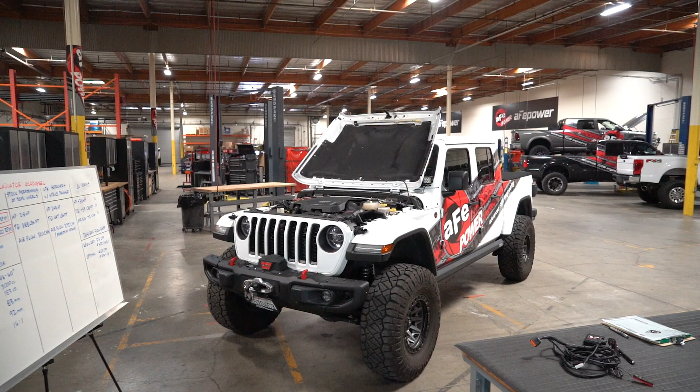Change the tuning, change the pressure, change all this stuff in the ignition, and do as much as we can to get the horsepower back where it is, get the torque low and high, and make the drivability come back. And for that, we have the Scorcher Plus, which is here, and I will have Chris talk about it in a minute. And also, this has to go with an air intake system, the Momentum intake.

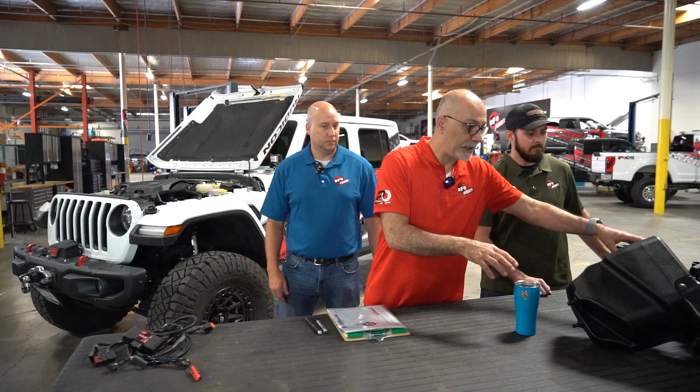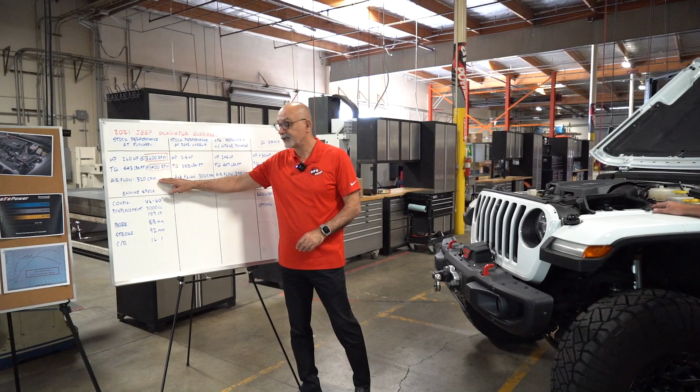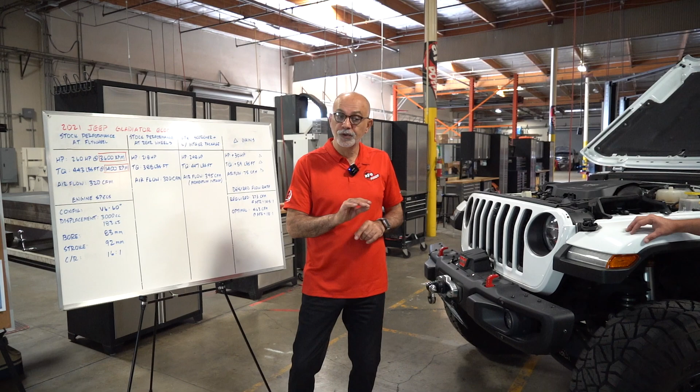We have a stock intake here, and let me go back and find out what we are looking for. So, stock intake flows 320 CFM. This is done at 7 inches of water, roughly a quarter PSI. At 7 inches of water restriction, the losses due to the pumping are minimal for the horsepower. That means you don't lose horsepower, you don't lose torque because of the induction tract. The factory flows 320 CFM.

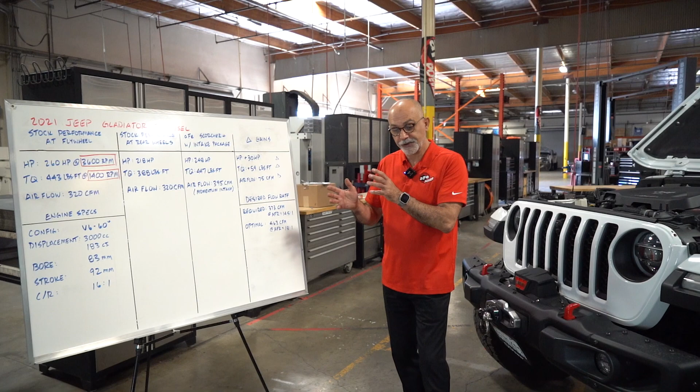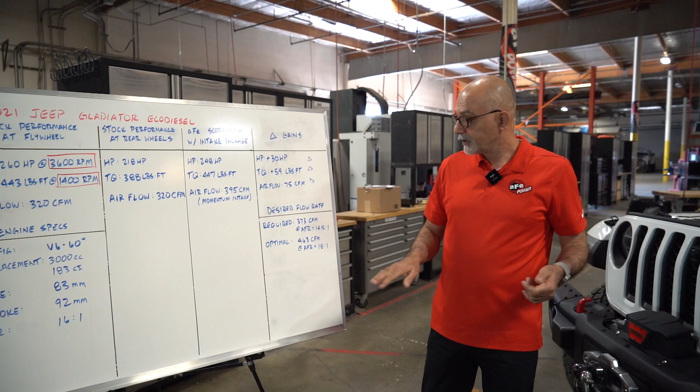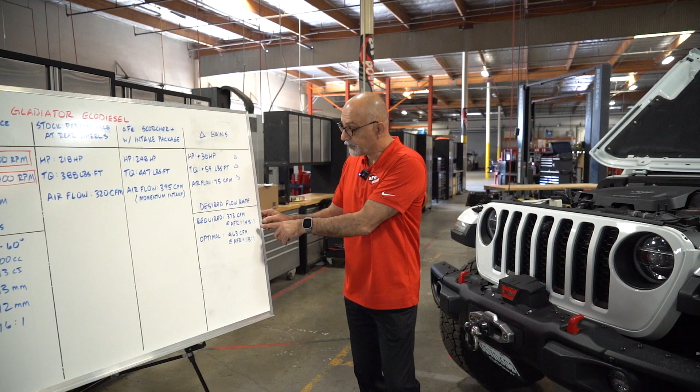At an air-fuel ratio of 14.5:1, which is stoichiometric, meaning complete combustion, you need 373. For maximum power, which is really 18:1, you need 463. Air-fuel ratio is very different for gasoline than it is on a diesel. So diesel, the leaner it runs, the better it is. Anything less than that, about 13 or so, the diesel is going to smoke. This ratio, 14.5 to 1, means for every pound mass of fuel, you need 14.5 pounds of air.

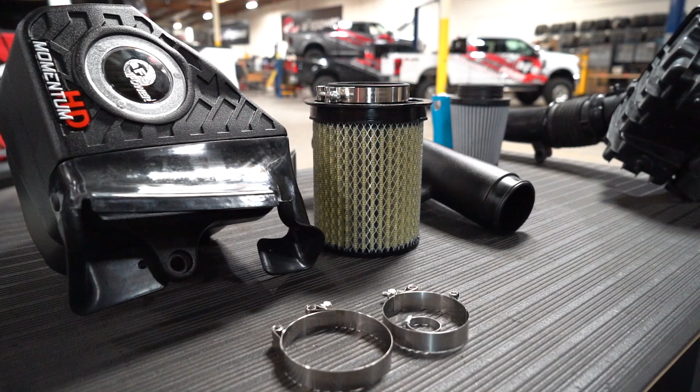So you cannot make more horsepower without adding more air. That's very simple. To get more horsepower, you need to have fuel, and fuel is going to generate the heat, and it is going to pull the air in. So these two are a must-have. So Justin, you've installed the Momentum up here, and you also have the stock. So start with the Momentum. Tell us what's going on with this.

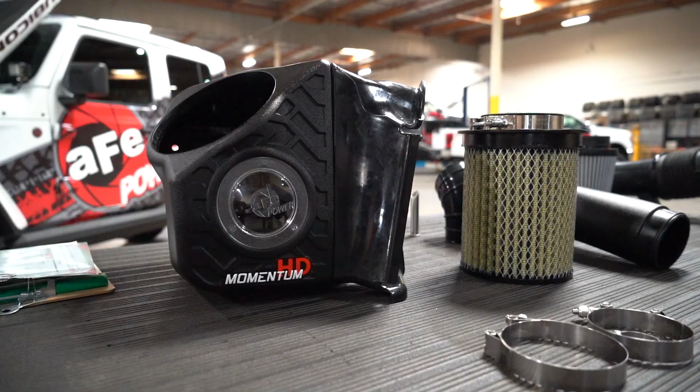Yeah, we had a couple of challenges here. So the stock intake, although it looks like it's got a large tube, the inside of the tube has a muffler, so the flow path was quite a bit smaller. It's quite restricted on the air filter size. As you can see, it's a large air box, but that's because it's got a scoop integrated into it as well, so the air filter size is quite small. So in order to increase the airflow, we had to do a couple things. We integrated the scoop into ours too, but it dumps right into the top, which gives us a lot more room for a large air filter, while still providing a seal here to help with the hot air.

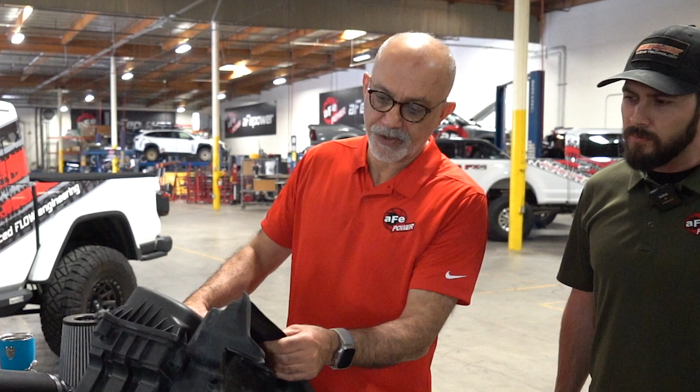I see this scoop on the side. Yep. I know you had a lot of challenges designing around this. Tell me what is this all about? Why does that look so strange here? Yeah, so one of the things Jeep does here, they put this scoop so high for water fording. So a lot of the time it'll have air coming in from the front of the vehicle, it dumps out underneath the box, and it ends right about here. So there's a disconnect on that.

The air has to make its way up and over into this snorkel, which prevents water from coming directly from the front of the vehicle into the intake. So really what they're trying to do here is make a disconnect between the front of the vehicle and the air intake for the water path. In doing so, they provide this seal here to block out all the hot air, and then it funnels back down into the bottom half of the air box to pass through the air filter and then back through the intake tube.

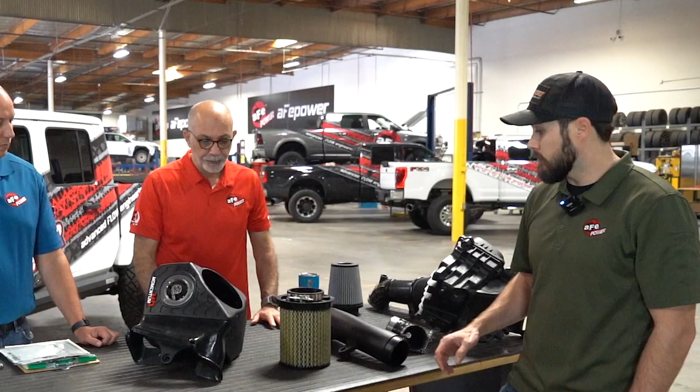Explain to me, I've seen some intakes in the market, they go right directly here. They take the easy path. Tell me, what is wrong with them? What is their major malfunction on that? Yeah, if you're going directly from the engine bay to the air filter, you're pulling a lot of hot air. A lot of the openings are quite a bit lower, so you have the risk of water entering your intake. So we really spent some time making sure that we maintain the water fording height of the stock intake here. Really the idea was we wanted to get a larger filter in there.

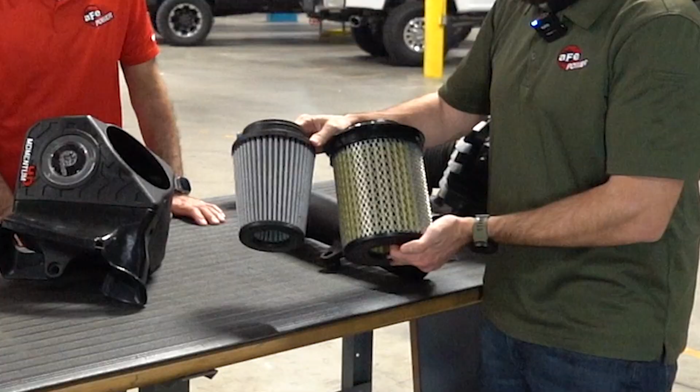So with the stock air box, if we maintain the air box, we're limited, like on our Rapid Induction, to this size filter because it's got to fit within the parameters. So replacing the air box gave us an opportunity to increase the filter size. And then based around this filter, we designed the air box. So this still maintains the stock air scoop coming in from the bottom, so you can see the channel here. It bolts in using all the factory mounting locations, and includes a seal to prevent the hot air from entering. All of our Momentum intakes have the window in the top, so you can inspect the filter without disassembly. And then we integrated a tire tread design just for the off-road lifestyle.

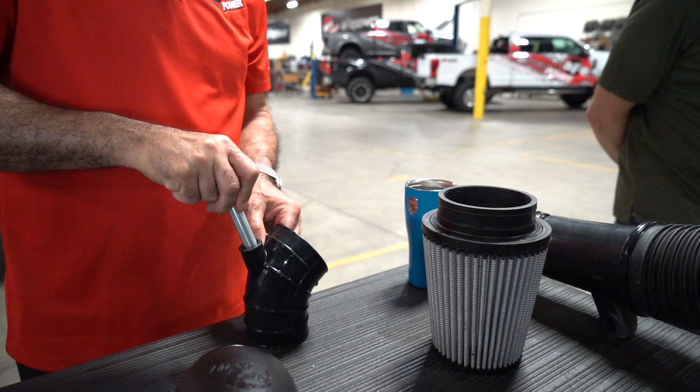During our testing, we were trying to reduce the number of parts that we include in the intake. But one of the things that we found was opening the intake up and reducing that restriction was causing a check engine light with the crankcase ventilation. So we needed to pull more vacuum on the system. So if you look inside here, we were able to make a vent tube right in the center of the air intake path, which will help pull vacuum from the crankcase ventilation.

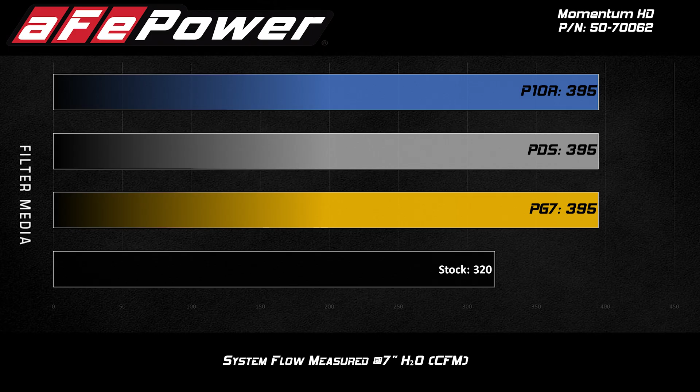All right, so here what we have is a chart, 395 CFM. There are charts up here. This is our Pro 10 media, the dry washable, the Pro Guard 7, the best filtration, and the stock 320. So the idea first was to unlock the mechanical restriction. Before we do anything else, we need to unlock that. If you don't unlock that, you're going to waste a lot of time and energy pumping more air. Yes, you can get more horsepower, you can get more torque, but you're going to pay a price in fuel economy, in the delay, and also in drivability.